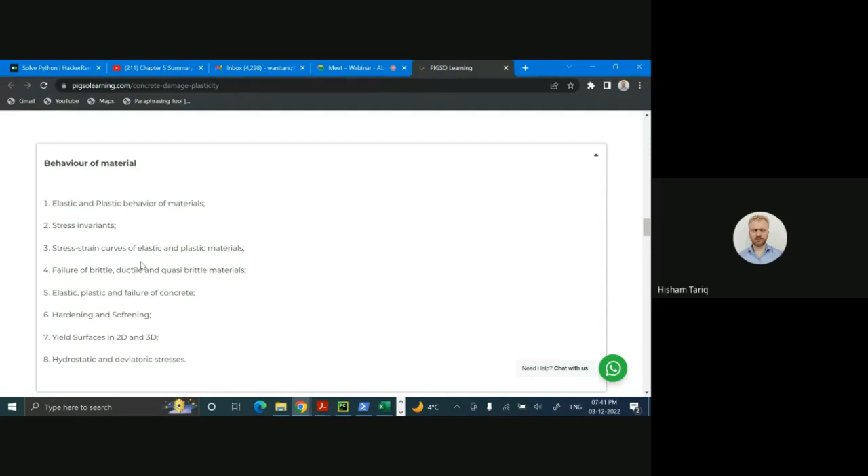I'll quickly discuss the syllabus. Firstly, we'll start with the behavior of materials, mostly elastic and plastic materials, where our focus will initially be on concrete. We'll discuss how brittle, quasi-brittle, and ductile materials fail, then stress-strain curves of elastic and plastic materials, then move towards elasticity and plasticity of concrete, hardening, yield surfaces, etc. These will be the basics of material behavior that will help you understand how we define the concrete damage plasticity model.

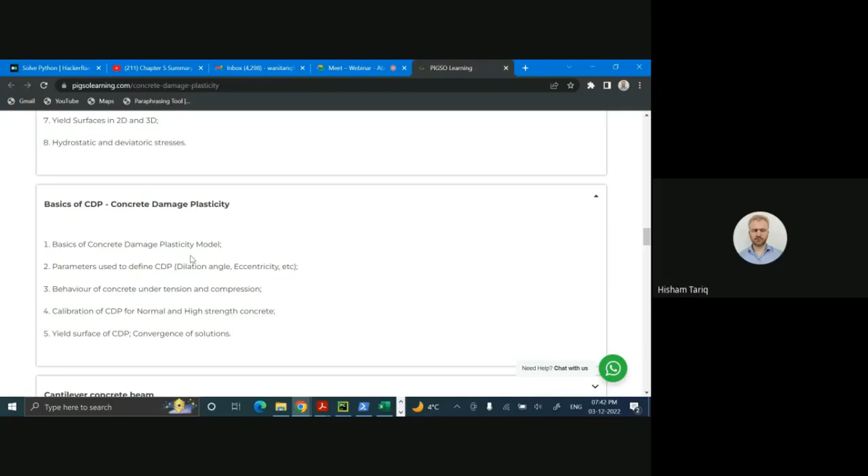This model is in Abaqus and helps you simulate the behavior of concrete. This constitutive model is very famous and widely used throughout the research community of structural engineering. We'll study the basics of the CDP model, the parameters used to define it, and the yield surface of the concrete damage plasticity model. Then we'll study the behavior of concrete in tension and compression, discussing equations and how to plot or obtain the stress-strain curve of concrete if you know its strength. There is a slight difference for normal strength concrete and high strength concrete. We'll discuss all these things, and then, if you use the CDP model, you may have convergence issues if you use Abaqus Standard.

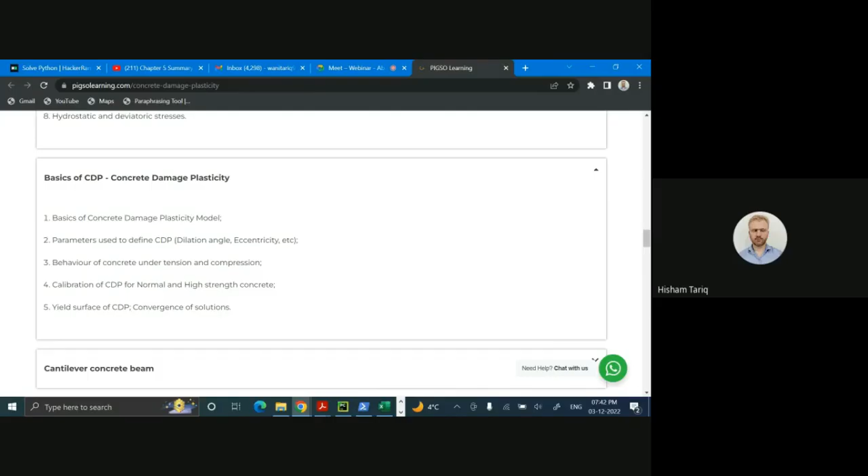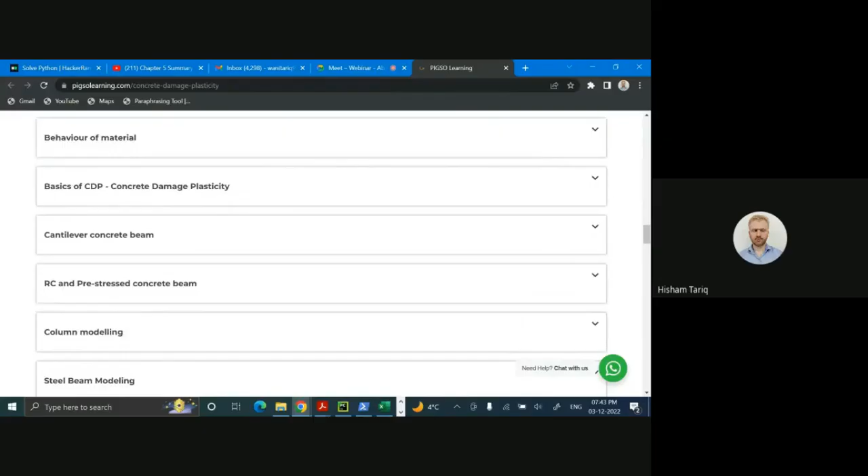That will also be demonstrated, how to take care of that. Further, we'll apply the concepts learned here and in material behavior and CDP in a cantilever beam. So we'll model a cantilever beam, a plain concrete cantilever beam.

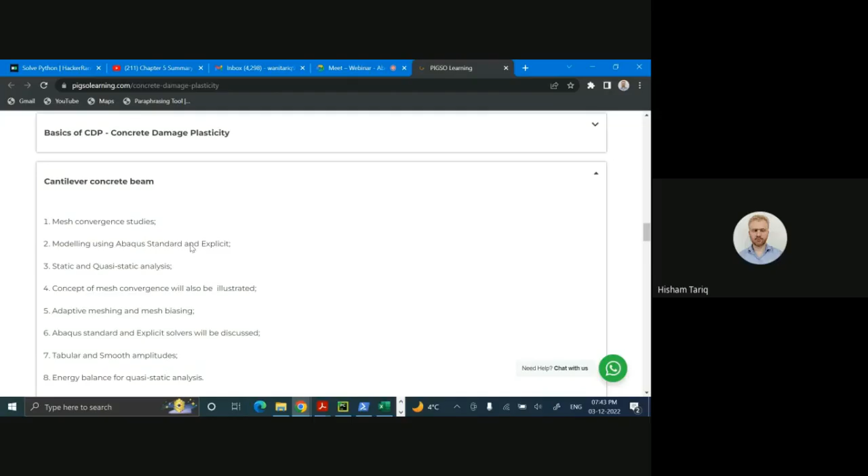Then I'll discuss mesh convergence study. There are two main solvers in Abaqus: implicit, that is Abaqus Standard, and explicit. I'll discuss the difference between them, how each solver solves the problem. Static analysis is done in Standard, and quasi-static in explicit. I'll discuss those things, and mesh convergence will also be illustrated.

Then I'll teach about mesh biasing, how in some areas you need fine mesh and you can keep the coarser mesh near the areas which are not of interest to you in the beam. Similarly, the difference between the results in Standard and explicit will be discussed, following how you have to define the load. You can define it instantaneously using a tabular amplitude or smooth step. Those things will be discussed in this module.

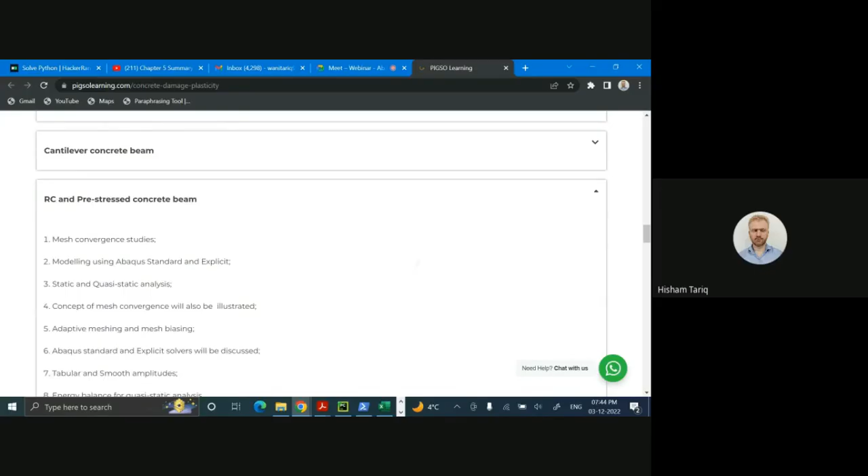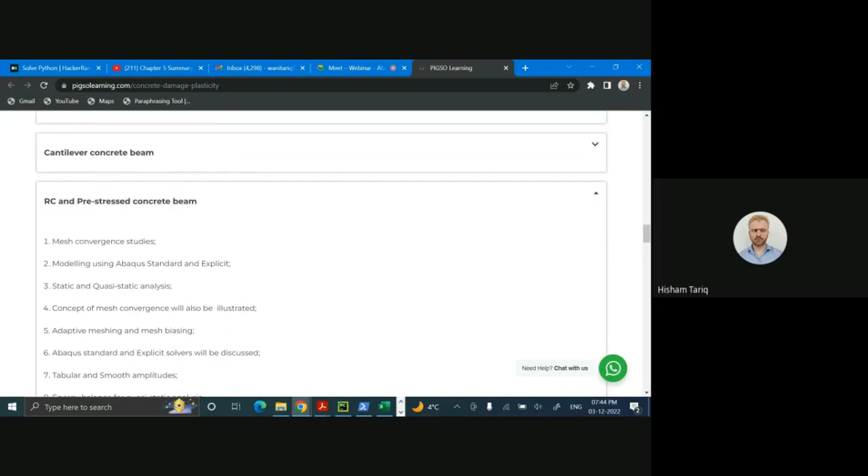Following that, we'll go a little bit advanced where we'll reinforce our concrete beam. So after reinforcing our concrete beam, we'll... okay, there is some, I don't know, this has been copied twice. Anyway, Mayank, you should correct it.

You should put the contents of RC and pre-stressed concrete beam here. Anyway, here we'll discuss how to give reinforcement to the concrete, embedded constraint, basics of steel as reinforcement. Then we'll go over how to give pre-stress, because in pre-stressed concrete you have to give pre-stress to your bars. We'll also discuss that.

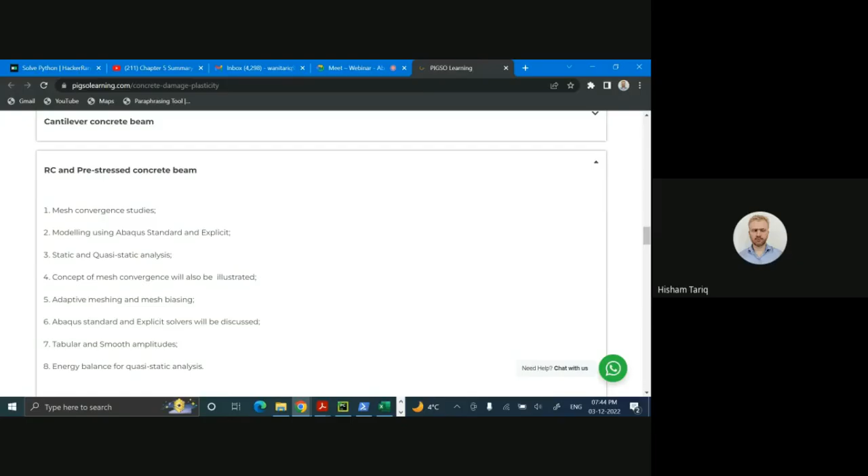And that is, the most common method, a cooling method where you use thermal stress analysis. That's how pre-stress is given, so I'll discuss that in this module.

Following that, we'll model a concrete column under compression using a solid element, or if you have a circular column, to improve the computational efficiency we can also model using axisymmetric elements. That will be demonstrated. Obviously for axisymmetric elements, the load should be axisymmetric, boundary conditions should be axisymmetric, and the geometry should be axisymmetric.

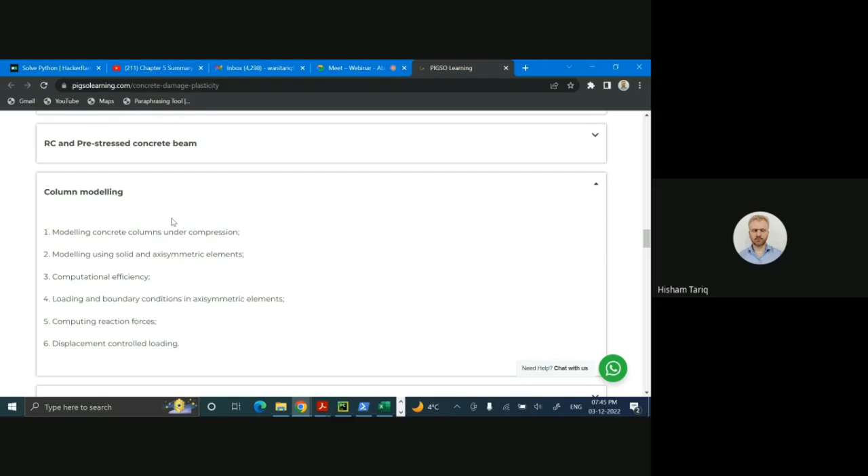That will be demonstrated. Following that, I'll discuss how, if you are modeling a column and you want to compute the reaction forces, we have to use rigid body constraint for that. That will be discussed further.

Displacement control loading will also be shown, because there are two types of loading: either you apply a force somewhere, or displacement control. If force is applied, then say force is constant, acceleration is constant, velocity varies linearly with time, and displacement varies as a function of time quadratically. But if you apply displacement control loading, then you are just varying displacement with respect to time. So there is a fundamental difference between the two types of loading that will also be discussed.

Furthermore, we'll go with steel beam, and I'll also demonstrate some of this today. We'll model steel as elastic and then as plastic material, because it's a ductile material. Then what constitutive modeling models are used for steel will also be discussed. In that, probably we'll discuss today also engineering and true stress-strain, plastic strain, these things.

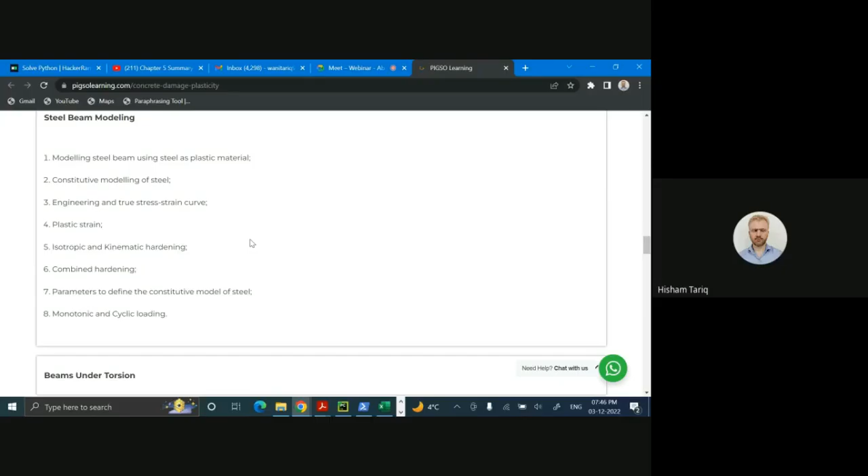And then isotropic and kinematic hardening, these things are for cyclic loading, because if you are modeling steel under monotonic loading or cyclic loading, you have to define parameters differently. So that will also be discussed. We will, after this introduction, discuss today just steel beam under monotonic loading.

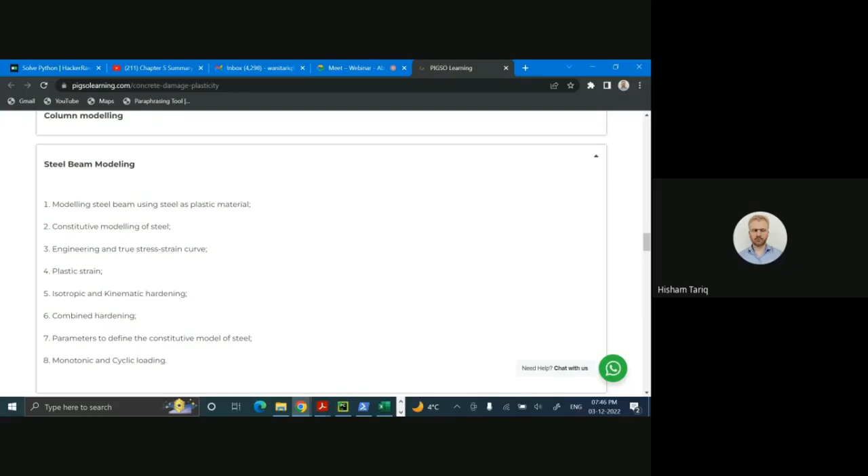Further, I'll show you how to apply torsion on a beam and do torsional analysis. We'll see the variation of shear stresses in different beams, maybe circular, square, rectangular, and for that we'll use coupling constraint. We will couple the reference point to the surface and apply torque on that.

Rigid body constraint for computing reaction forces, and these meshing techniques and path plotting, they'll be like there are hex dominated, wedge techniques. These meshing techniques will be used for modeling circular beam, and path plotting will show you the variation of shear stresses along a path.

So then we'll go to heat transfer analysis and thermal stress analysis. This is important because it has application in, maybe, concrete under fire, or simulating thermal behavior of viscoelastic materials. We'll start with how heat transfer analysis is performed in Abaqus. We simulate conduction, convection, and radiation, and also temperature boundary conditions are given here. We don't have to use the geometric boundary conditions for heat transfer analysis.

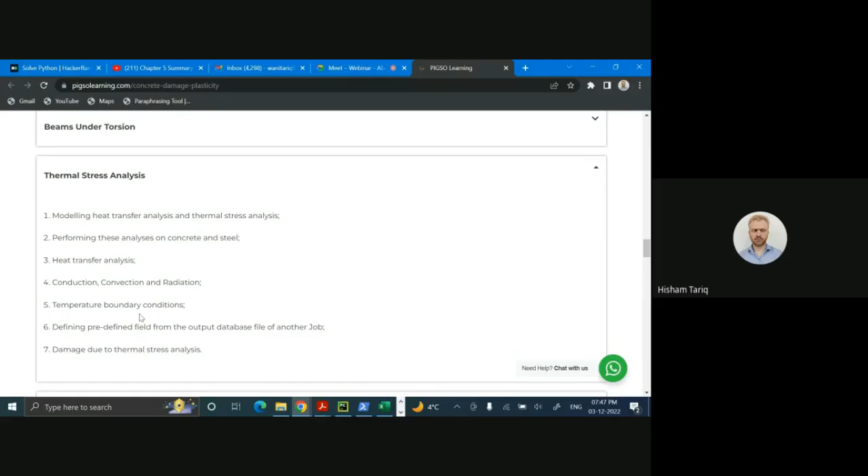Then I'll move to thermal stress analysis, for which we define this temperature field using another job file; that will be demonstrated. Then we'll apply it to concrete and steel, and I'll show you how it causes damage to concrete.

Then we go to damage analysis, where we have a concrete sheet and an object falls on it. We'll use the dynamic explicit solver for this. Obviously, when you're in dynamic explicit studying impact problems, you have to define inertia and give mass to your falling object, or maybe to the whole system.

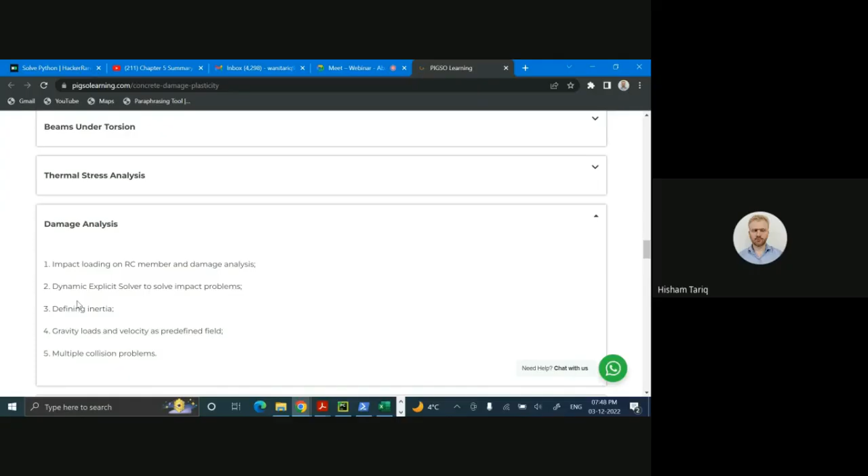Then I'll show you multiple collision problems. Suppose a ball or object falls on the sheet, then goes up, goes down, goes up, goes down, like that, in the presence of gravity. That will also be demonstrated in this module.

So this will probably be it about the modeling part, the modules, and we'll go for projects. Firstly, we'll model a cantilever beam, maybe an elastic cantilever beam.

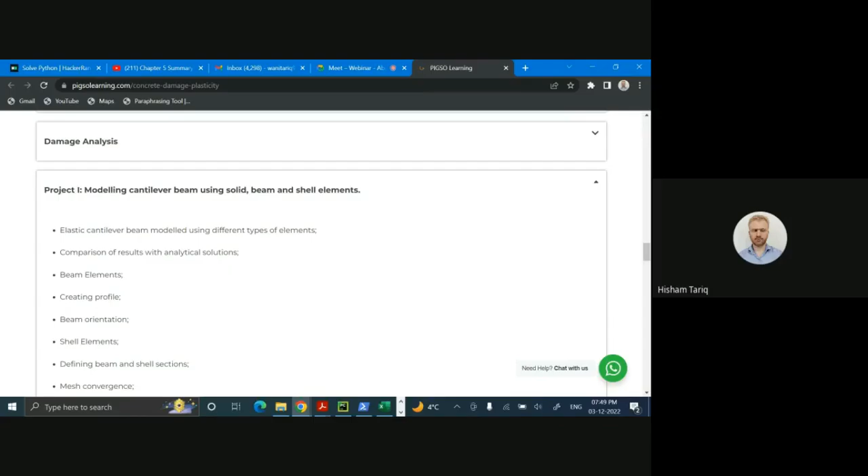What we'll do is take a similar problem, a cantilever beam with a displacement applied at the tip, and solve it with solid elements, shell elements, beam elements, and plane stress elements. In each of these, we'll go into detail and compare the results and the computational efficiency in each case. This will be the first small project.

Then we'll study the size effect of concrete. I'll use plane stress elements and concrete damage plasticity. What we'll do is change the size of the element self-similarly, and see how it affects the tensile shear stress-strain curve of concrete.

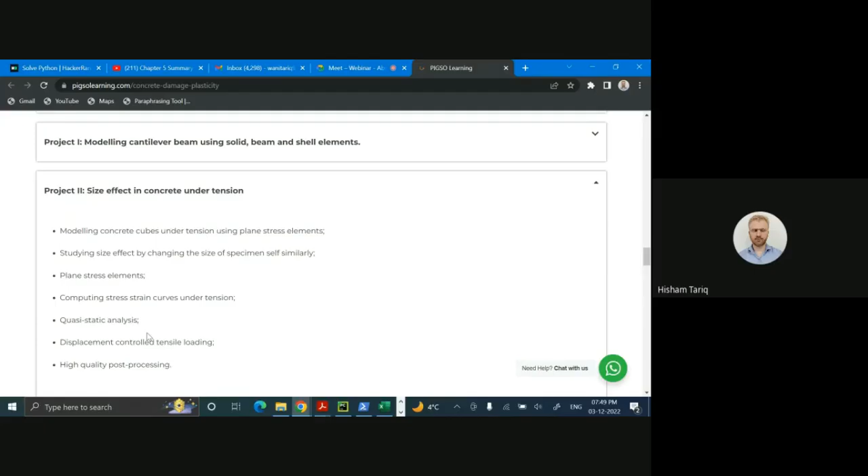I'll show you very good post-processing, how you remove the edges or whatever, and how to extract data from a bucket. Those things will be demonstrated, and obviously quasi-static analysis will be used. This will be discussed before that also.

Third project, we will model plain walls. In the previous course I modeled plain concrete walls, but now I'm thinking we can go with reinforced concrete walls also, and subject them to pre-compression followed by in-plane loading, then study drift capacity, stiffness, and in-plane strength for different levels of pre-compression. Different levels of pre-compression will affect these three variables.

Then we have the aspect ratio. Suppose we have a square wall with h by l, height to length ratio of 1. Then you have something like a slender wall, where height is greater and length is smaller, so h by l ratio is greater than 1. And then you have a squat wall, where length is greater than height. We'll study these three walls, and these parametric investigations can be carried out. I'll show for something, and the rest is your assignment, and you have to make a report out of it.

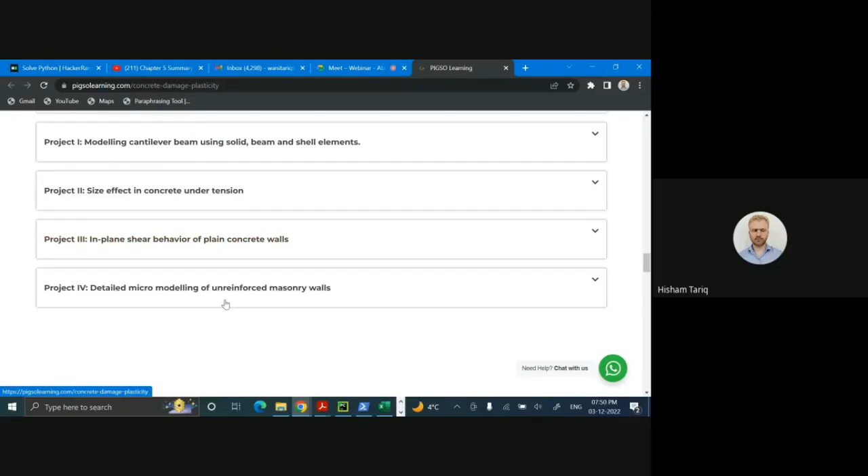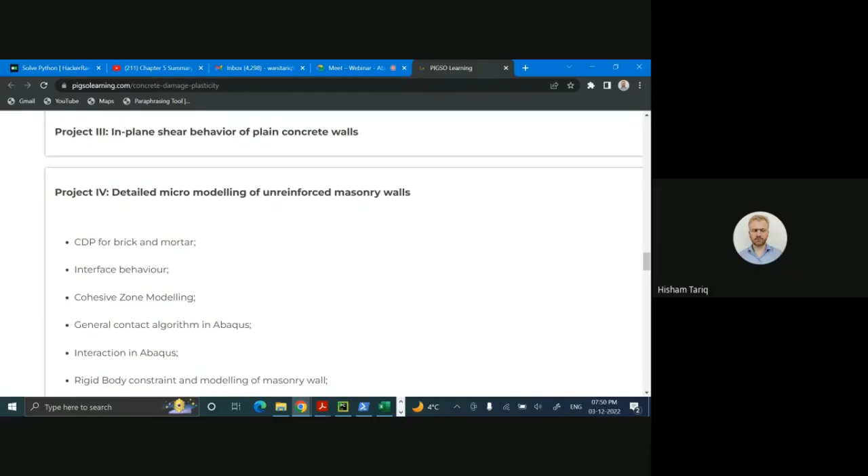Finally, if we get time, we'll go for unreinforced masonry. I have done this in a previous batch. Hopefully we'll be able to do it, but it's an optional project. If we get time, we'll study bricks and mortar, define them, and simulate them as plastic damage material using the concrete damage plasticity model.

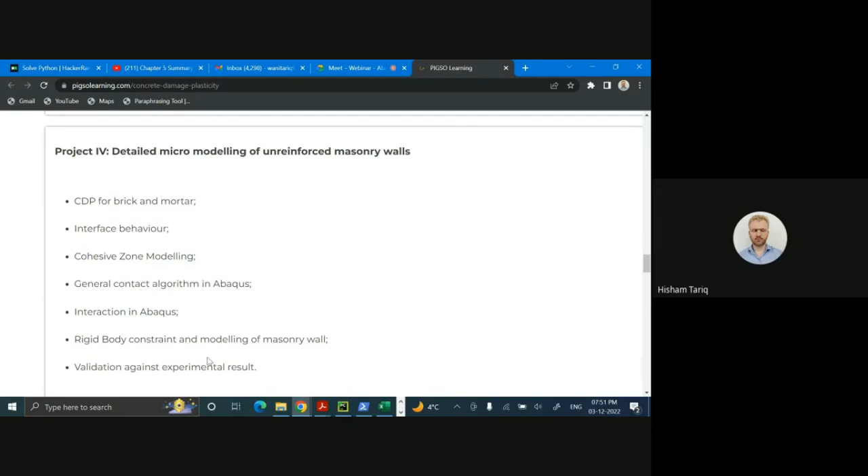I'll also discuss cohesive zone modeling and the interface between brick and mortar. Following that, we'll go into detail and validate our model against an experimental result. There is an experimental wall that was tested, maybe in 1994 or so, in the Netherlands. We'll model that wall in Abaqus, and I'll show you how our results agree well with the experimental result. So this is probably it about the syllabus.

Okay, so this will be just about monotonic loading.

So at lower levels of stress, the stress strain response is linear. Everyone knows that, right? But when the stress exceeds the yield limit, I'll show you what happens.

So what happens? Unloading will start, and it will come back to its own position. Suppose you have a specimen and you are pulling it. If the stress strain response is in this region, the moment you release your load, the specimen will come back to its original position. At this point you release your load, the unloading will start, and the stress strain curve will be like this. It will not come back to its original position.

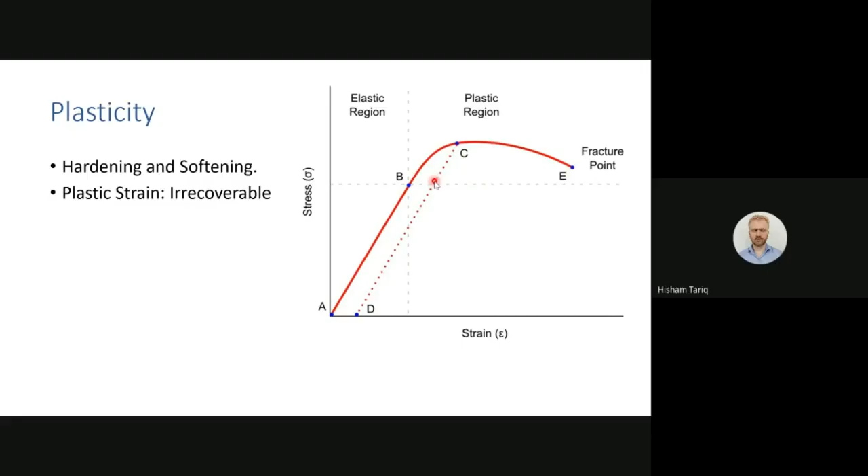I'll illustrate this in more detail. So firstly, let's talk about engineering and true stress strain.

But when you elongate, say, your steel bar, what happens? The longitudinal dimension L naught will increase by U, and A naught will decrease because the volume has to be constant. So A naught will decrease to A, and L naught will increase to L. So you can't use these engineering relations — they give you stress and strain, but not in the actual sense.

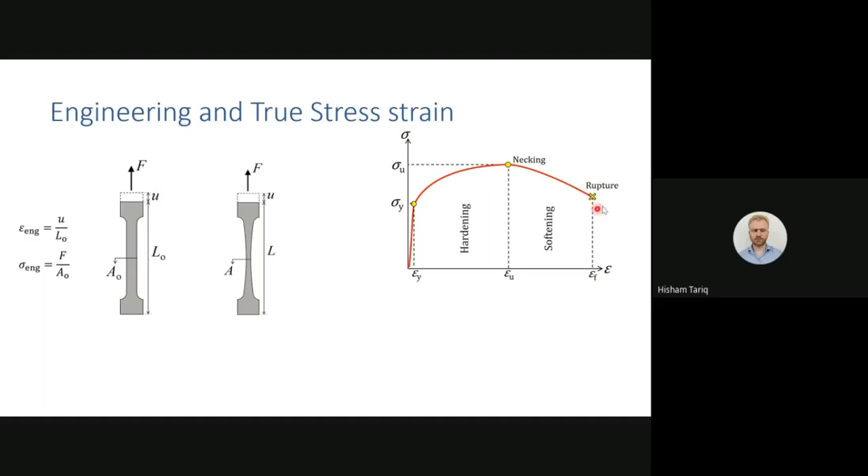So this is how the stress strain curves look like. Initially this is the yield point, yield limit. Then there is hardening, and at this point it's called necking. Necking means at this point the strain gets localized, and then it softens, and it's called rupture. So this is the engineering stress strain curve.

This red curve was engineering, but for the true stress strain curve, true stress is less than... sorry, true strain is less than engineering strain, because when you use ln, it decreases. But true stress is greater than engineering stress, because 1 plus engineering strain is slightly higher than 1, maybe 1.0001. So you can see the true stress strain response is slightly higher here.

But this relation is followed only up to necking — these two equations apply before necking, which is the localization of strain, only in the hardening region. After necking, till rupture, how do you calculate the true stress strain curve?

Either you use a simple linear variation. At rupture, you have the load applied in the experiment and the area of cross section you measure. You divide the force by that area to get the true stress at rupture. And the true strain is given by the same equation, ln of 1 plus engineering strain.

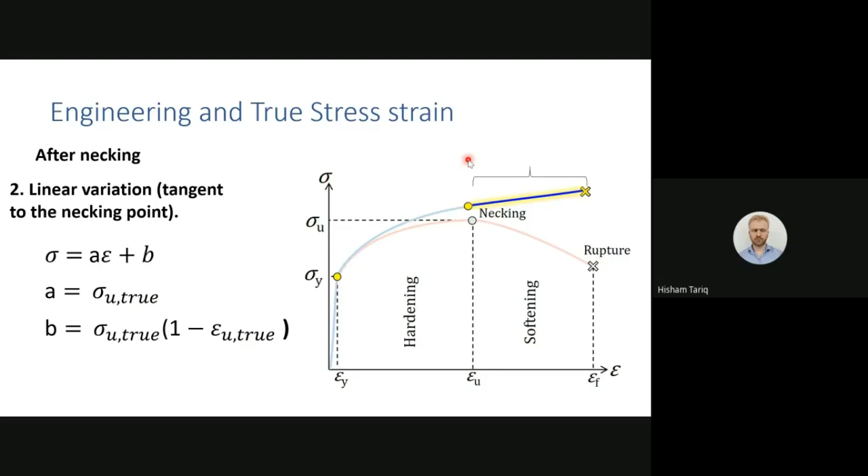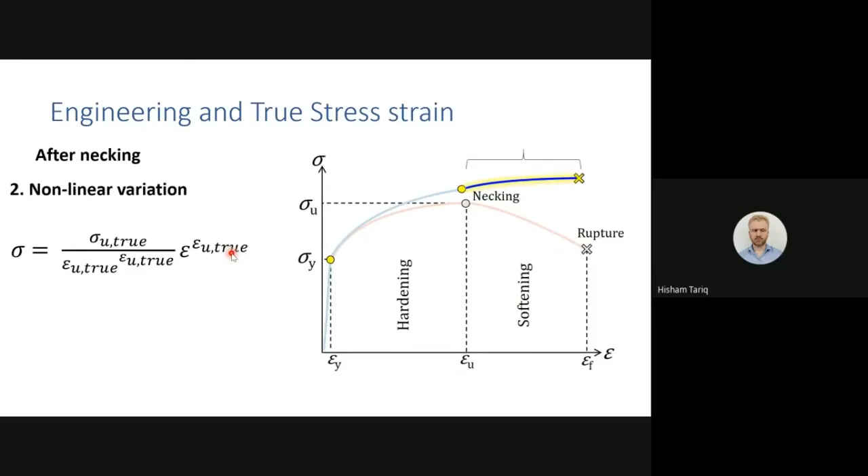This is a non-linear relation. When you enroll for the course, I'll share the research paper, by Ling in 1996. The paper's name is, I think, 'Stress strain curve of steel after necking' or something like this. So this is taken from that. These three methods were discussed: how to compute true stress strain curve after necking.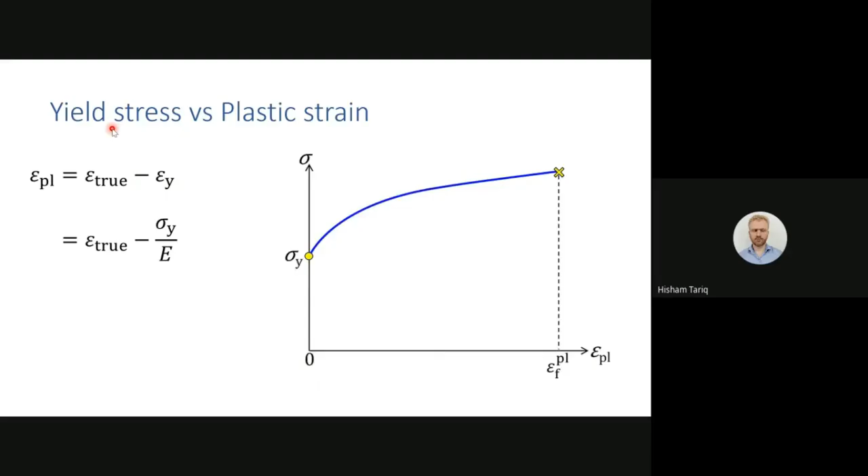Then in Abaqus, you have to input yield stress versus plastic strain. You already have the stress values, but how will you calculate plastic strain? True strain minus elastic strain. Elastic strain is epsilon y. So at this point, plastic strain equals true strain minus epsilon y. Epsilon y is given by sigma y by E. So you put this data in Abaqus, and this is how it looks: steel stress versus plastic strain, and you model the steel material.

Okay, so now I'll quickly go to Abaqus, and you can maybe get started.

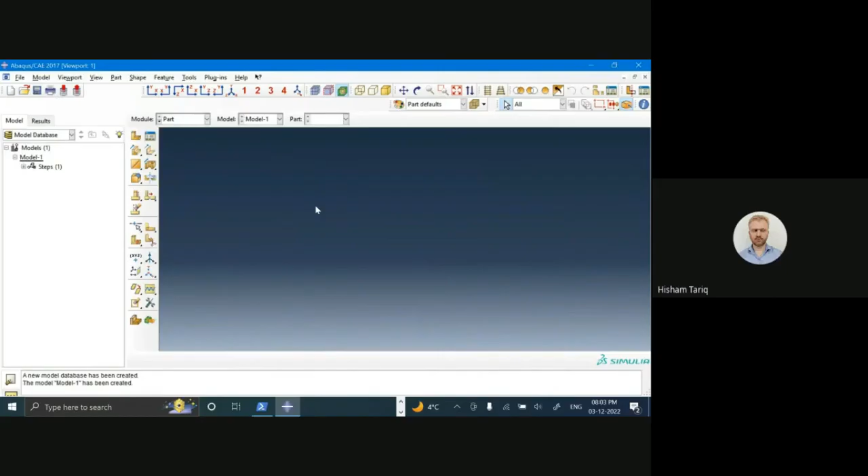So we'll do an elongation test of a rod, a steel rod. I can name it as rod. We'll model it in 3D, and it is deformable, using solid element, obviously, and I'll use extrusion to construct the rod.

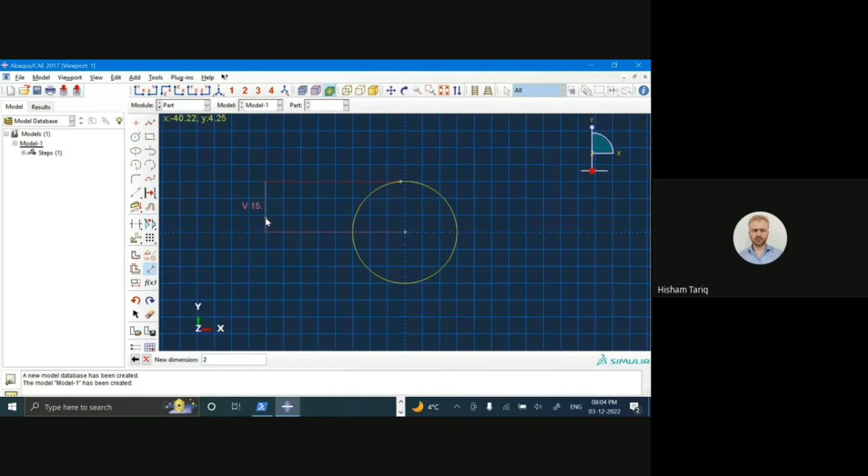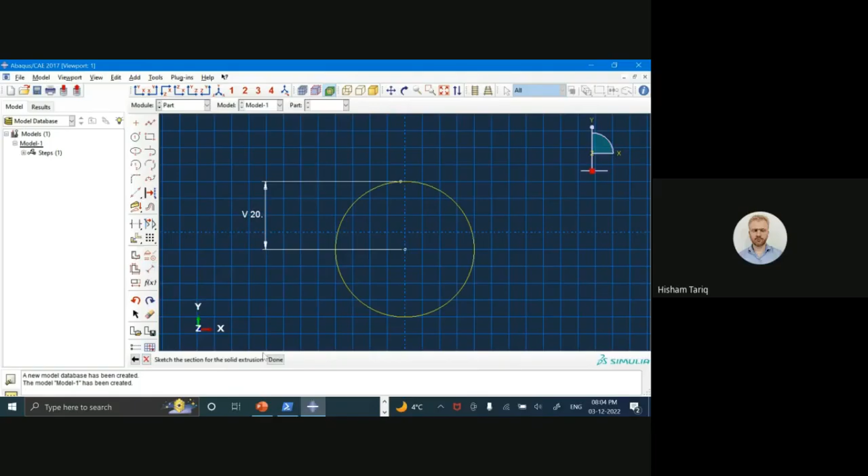I'll draw a circle here. This is how you click on this and draw a circle. I'll use some dimensions, the radius. How much should be the radius? Maybe 20 millimeter. Please note that Abaqus does not have any system of units, so if you are using a specific system, be consistent with it. Here I'm using millimeter for distance, Newton for force, and seconds for time. Then I'll click this; it will ask how much depth should I extrude, so maybe I'll go for 2000. So this is your steel rod.

Okay, go to property. Now we have to create steel. You go like this. Firstly, you define, keep it as just I'll show you, density, that is 7800 kilogram per meter cube, right?

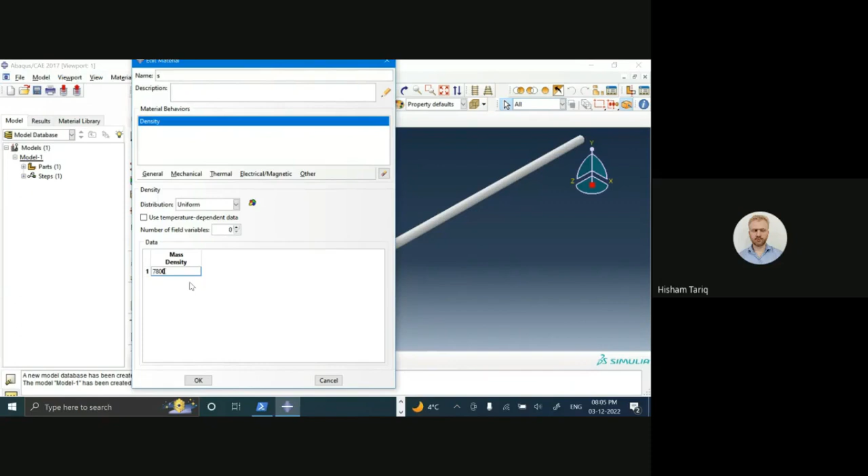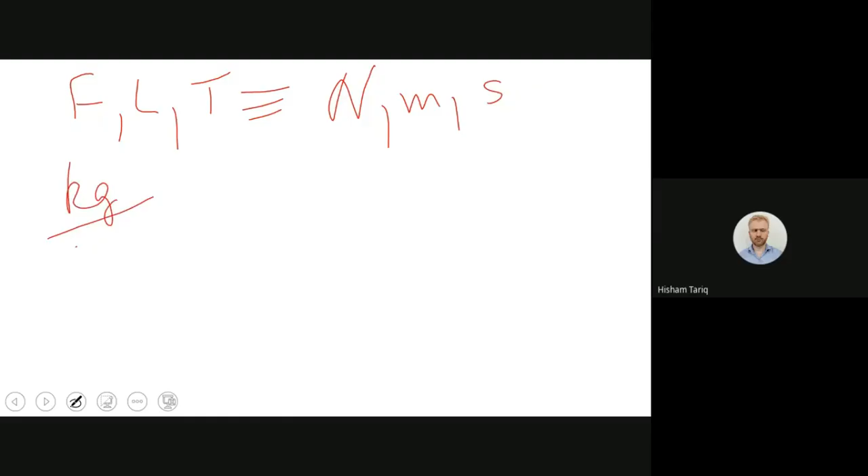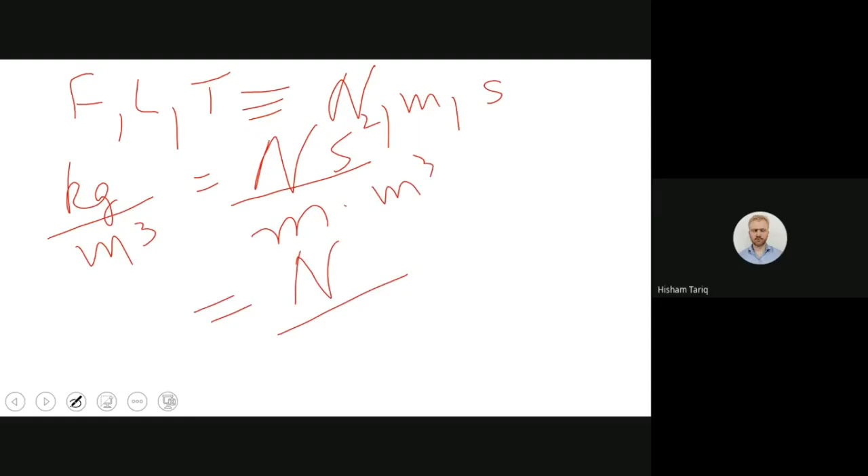But here instead of meter, I'm using millimeter, and kg is not my standard here, because my unit system is not MLT here, it is FLT. So kg per meter cube can be written like this: N equals to, like, F equals ma, right? Then I can write kg as Newton second square per meter. This is kg, and your meter cube, obviously second is same so just leave second. So you have Newton. If I convert these meters into millimeters, I'll get 10 raised to 12 millimeter cube. So I'll divide this value by, this is basic dimensions, 10 raised to 12. So it will be like 7.8 times 10 raised to minus 9. This is your density, right?

Then you go with elasticity. So Young's modulus of steel is, how much is it? Can anyone tell me? 2E11 Pascal, right? But here my units are not Newton per meter square, it is Newton per millimeter square, that is megapascal. So I'll divide this by 10 raised to 6. So it'll be 2E5. Poisson ratio is 0.3. So this is steel as elastic.

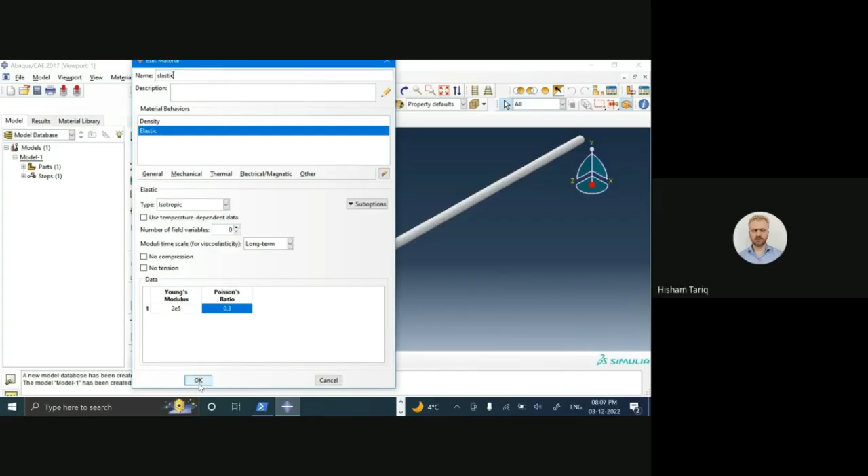Steel as elastic. Okay, then I'll first demonstrate elastic, then plastic.

I'll create a section, name it solid homogeneous. I'll just name it section 1, but you can name it steel. This material is used. This is now a section. To assign this section to the bar, you need to know which bar it is. Is it concrete? Is it steel? Is it aluminum? What is it?

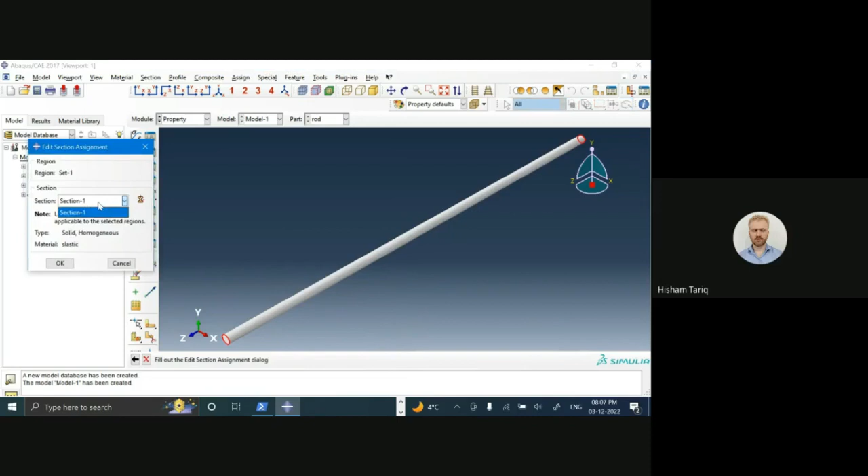So I have now assigned it. This is the only section we have created, and now this is a steel bar. Then bring it to assembly. When you create an instance, this means you had a part, and now you are doing an experiment on it. So you have transferred your part to the modeling space.

Now I'll apply some loads, boundary conditions, and stuff. Going to step here, I'll use Abaqus Standard, static general as of now. Obviously, later in the course, I'll discuss the difference between the two.

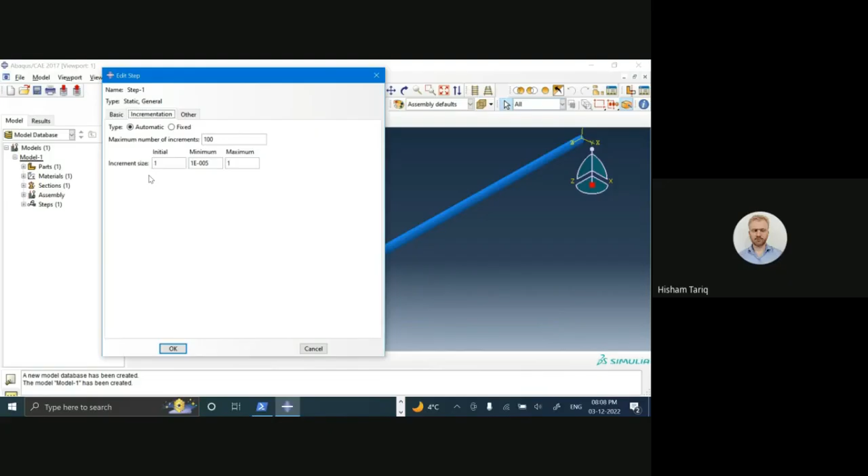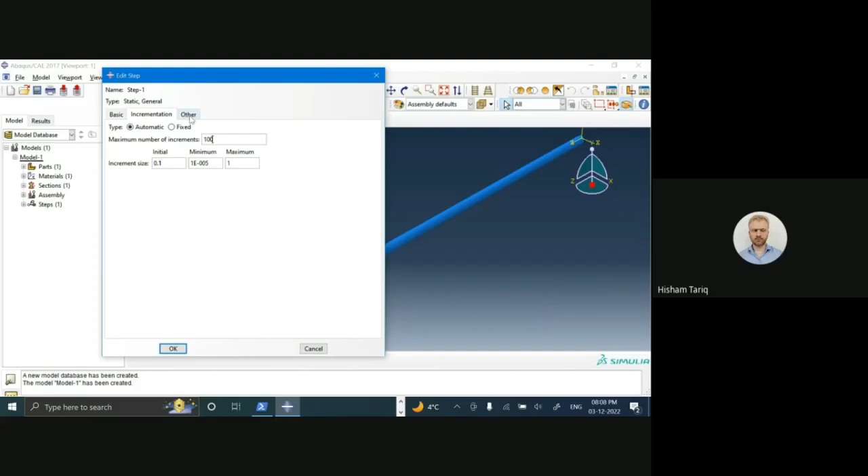So I'll use this 1 second time period. Abaqus Standard can sometimes directly solve in one go, but sometimes it cannot, so it's better to start with point one. It will first start applying load, say linearly varying, so first point one, then point one again, then again point one, like that. You'll see, I'll show you. Just keep it as it is, fine as of now, no need to change it. Okay, so this is step.

Then there is field output request. What do you want Abaqus to calculate for you? It has mentioned a lot of things: stress, displacement, strain, everything. Obviously, you cannot have plastic equivalent strain or plastic strain or LE for elastic material, so it's okay, it'll show warnings, but you can also remove them. Anyway, let's keep them as is because it's just a demonstration.

So we'll go for load. I'll fix this end and apply a displacement here, some displacement. Let's fix this end first.

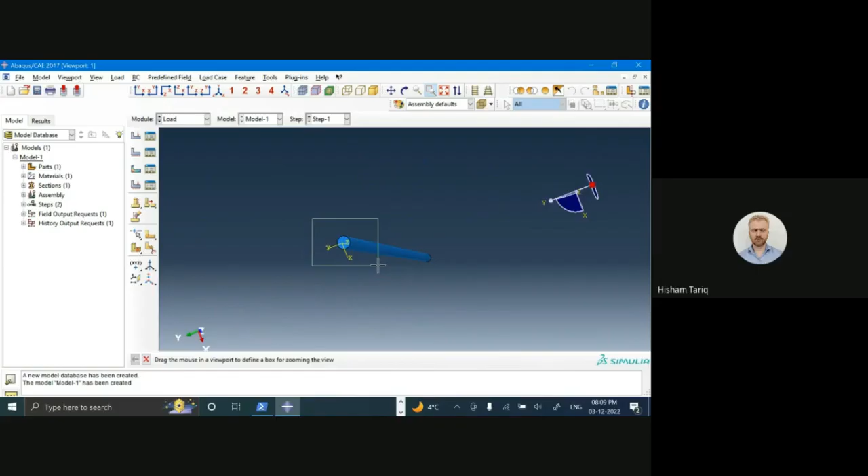If you go like this, this is box zoom view. Then you draw like this, it will zoom. Go for boundary condition, I'll fix it in the initial step. Select this one or this one, this one, then select the surface and fix everything. Now everything is fixed here.

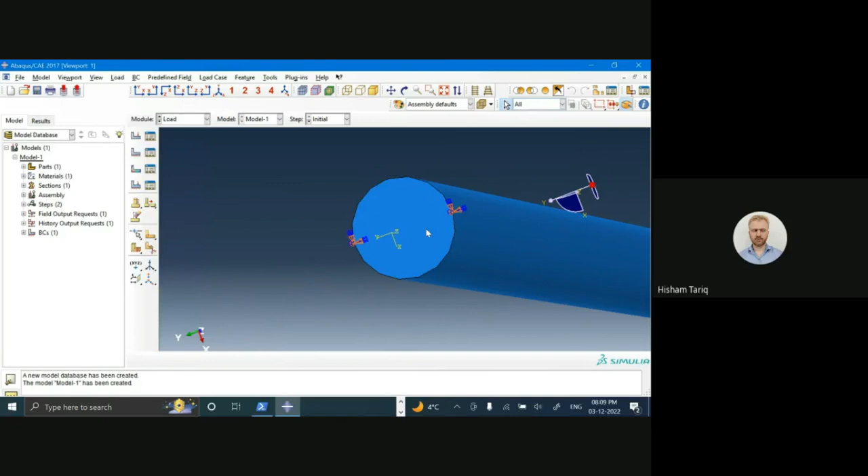I want to apply a displacement here, and also I want to get the force displacement response. I want Abaqus to calculate the force displacement response for me. So how do I do that?

I'll go to interaction and first create a reference point here. Now I'll use a constraint called rigid body constraint. So what it does, I'll show you. I'll select this reference point and I'll maybe pin or tie, you can use both of them, to these nodes.

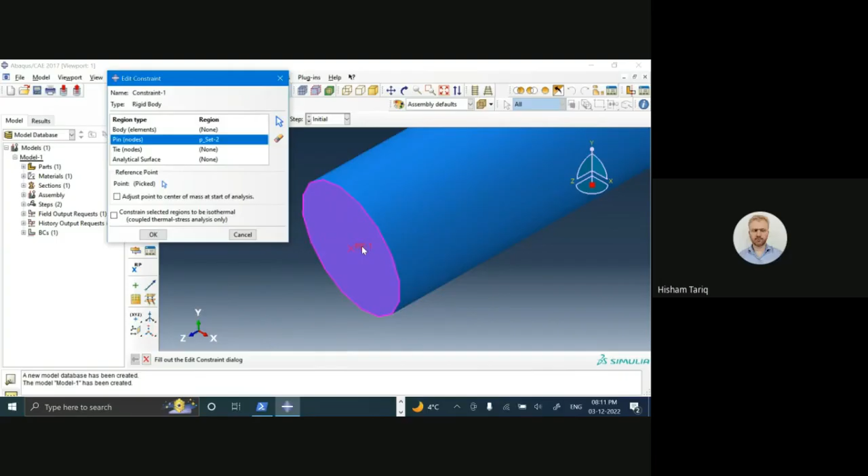What happens is, now all these nodes will behave as a rigid body, and if I give, say, 1 millimeter displacement or 1 millimeter per second velocity to this RP, that will be transferred to all of these. First thing. Second, then I have to calculate force displacement response at each node, because FE analysis discretizes the system. At each element or node, there will be a small reaction. This constraint sums up all the reactions and stores them here, so I can get the force displacement response for this bar.

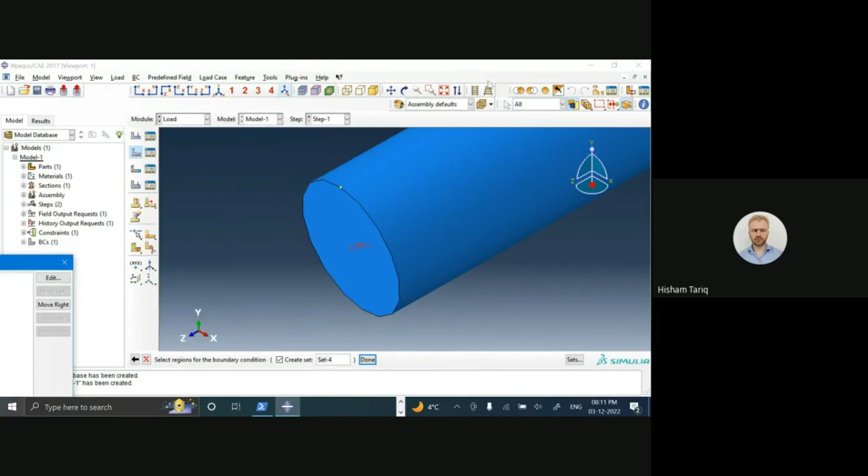Now this RP is here. Again, I'll define a displacement at this reference point. I want to maybe subject it to tensile loading. Click done. Just tensile loading, so all other degrees of freedom or constraints are 0.

But U3, I need to give some displacement, so I'll start with 3 millimeters. Give a displacement of 3 millimeters.

First thing. Another thing is I'll create a set. I'll name it RP and continue, then select this RP1. So a set is created corresponding to this RP1. Why? Because I need field output, I want Abaqus to calculate the force displacement response at this RP.

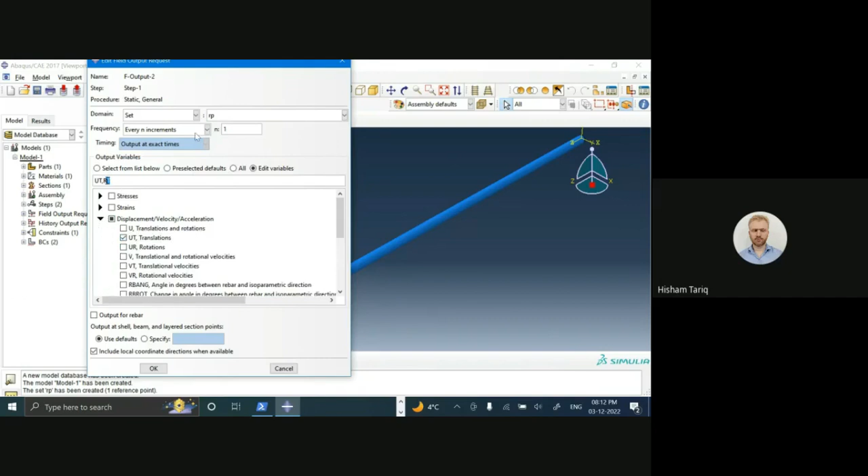So I'll go to step again, in this field output, create a field output here in step 1. What do I want, and for what? For set, which set? RP. And what do I want? Forces and displacements. Okay, so rest just keep it as is. Every n increment means how many increments Abaqus used, so at every n increments it will write the output. You can also use every x units of time.

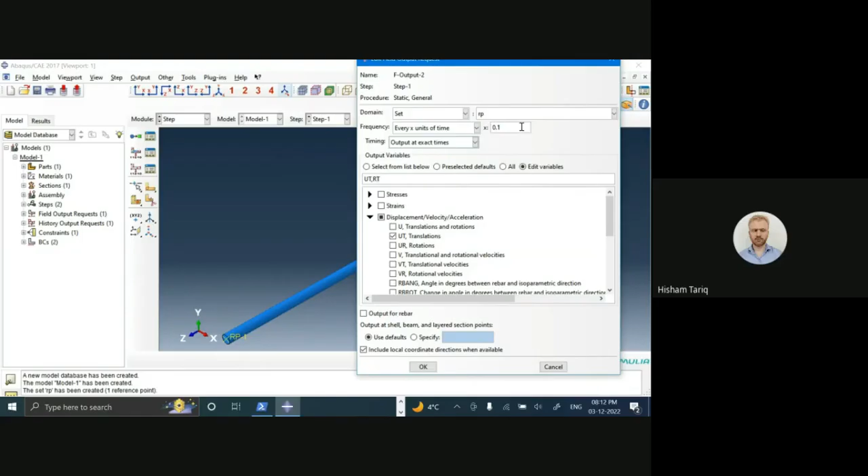Total time is maybe 1 second. I can here write 0.1, so it will now write output after every 0.1 seconds, then select OK. You can also use n increment, depends. So we have also applied the load maybe. Yes, now go to mesh. We had, see, if you go to, sorry, in assembly here, so this is dependent. This is dependent.

This is dependent because it's showing here 'make independent.' So when you go to mesh, you have to mesh the part. An assembly can be made of different parts, right? If you use independent, it will discretize the whole assembly together. If you mesh by part, you can discretize some parts finer and some coarser. I'll explain it later when we have multiple parts.

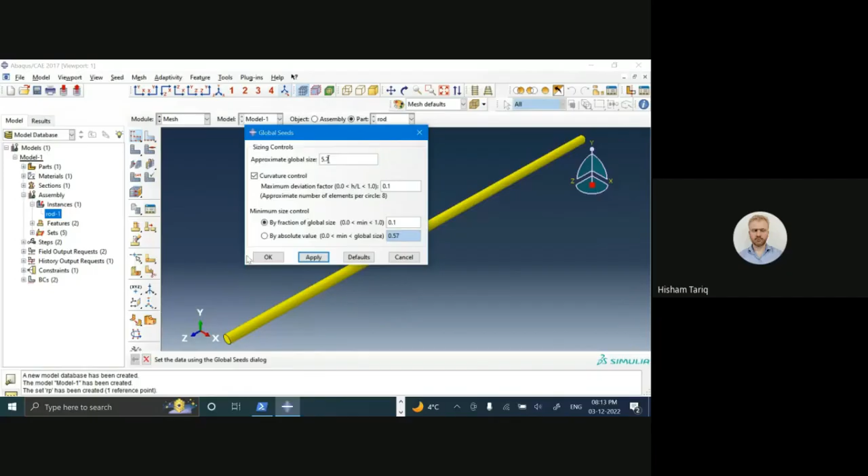That's not an issue. Anyway, just see, this part is 5.7 millimeter. Let's keep it as it is. And this is now discretized, so it is divided into small elements. This is FEA, right?

Following that, I'll go to job. I'll select elastic, with 3 millimeter displacement. Now I have to use parallelization because my PC is relatively good, so I'll use 6 processors to solve it quickly. I have 8, I'll use 6. Submit this.

So this will be completed very fast. This was elastic, right? I'll copy this model and name it steel. Everything is same. Now I want to simulate steel as a plastic material.

In the first model, I just defined 3 things: density, Young's modulus, Poisson's ratio. But they are not sufficient to define plasticity. So how do I define plasticity? I'll show you.

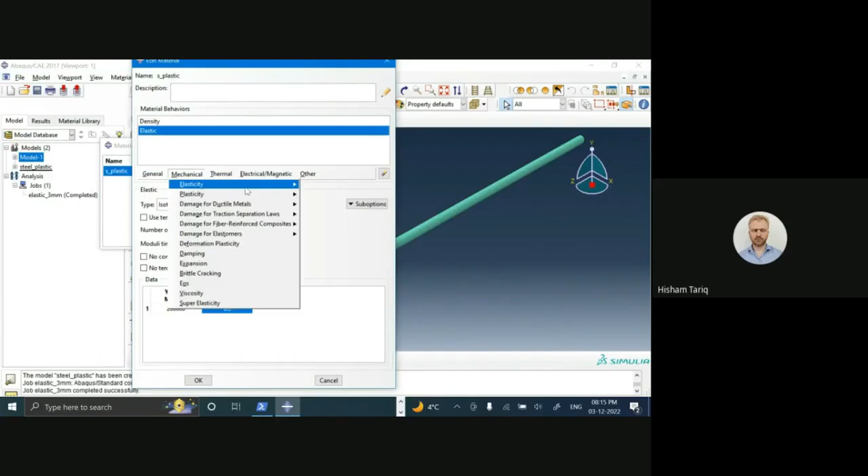Same material is there, maybe I rename it as plastic. Once I did it, these 2 things are as it is. You need to define plasticity and plastic here. As of now, keep it isotropic. When we go for cyclic loading, we have to use combined hardening and then use parameters. I'll discuss them when we reach there. So as of now, keep it isotropic.

As I said, you have to input yield stress versus plastic strain. This is where we stopped, right? Yield stress versus plastic strain. How do you calculate that?

I already have the data. Okay, so here is the data, this one. Okay, so here it is. See, this is the engineering stress-strain curve, right? This is from experiments. And this is the yield point, this value of stress.

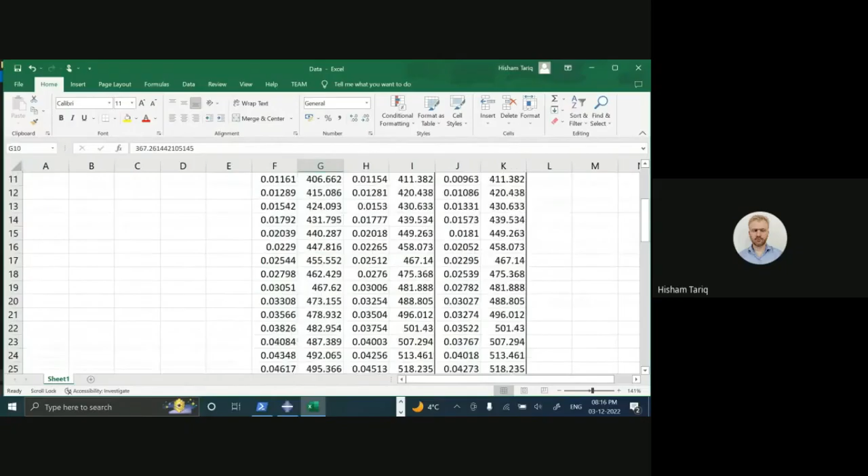After this, hardening will start, right? Hardening will start, then there is necking, right? I discussed necking, strain localization. So at this stress, engineering stress, necking starts. And then we have used a linear variation, these are from experiments, a linear variation from necking to rupture. So this is your engineering stress, engineering strain.

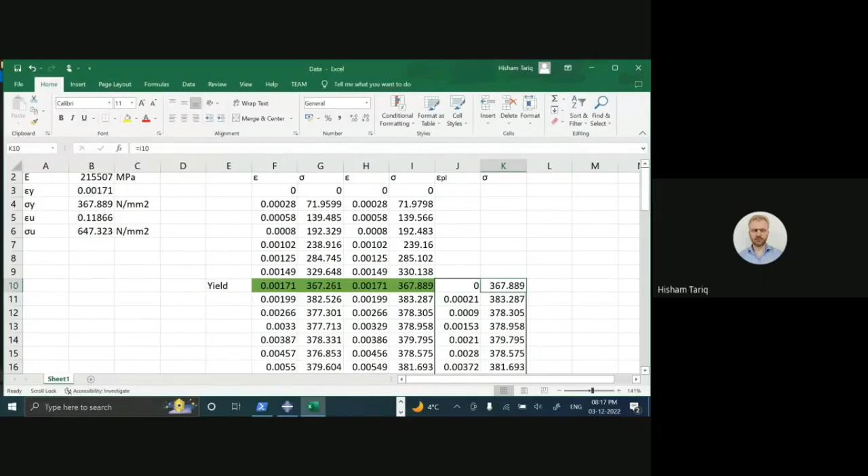You can convert it to true strain using this formula, already discussed. This is your engineering stress converted into true stress using this formula, already discussed. Now you have the true stress-strain curve. Up to yield, there will be no plastic strain, because if you unload, the specimen will come back to its own position. So at yielding, plastic strain will be zero, and this is your yield stress, that is true stress.

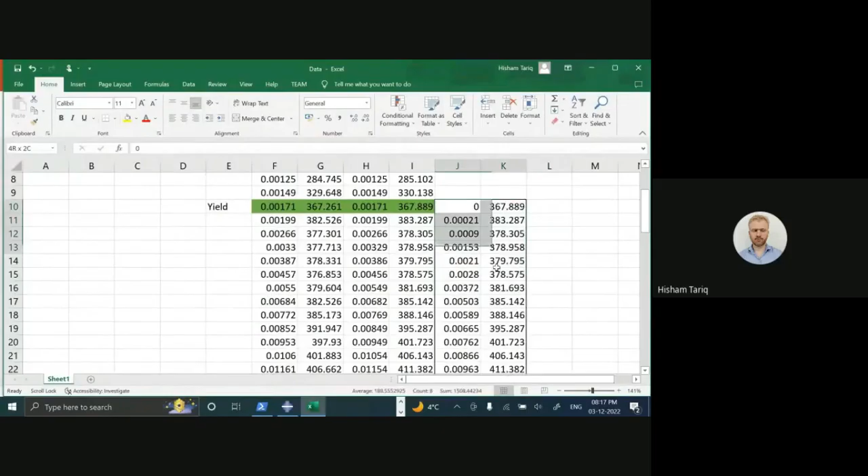Following that, you will calculate plastic strain using this equation. So the similar equation has been used here, and you will get the plastic strain and yield stress data. So this data has to be inserted in Abaqus, right?

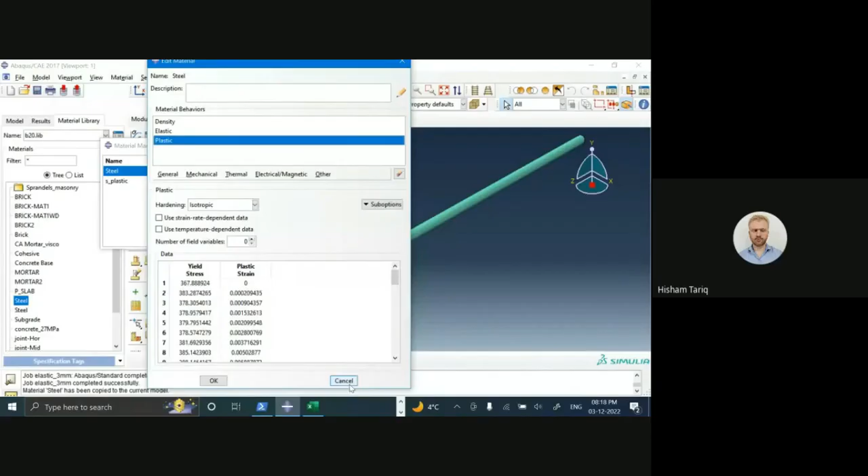So I have probably already defined this material in my material library. I click this, hopefully this will be... yes, see, I already copied this and defined it in my material library. Yield stress versus plastic strain. So all you have to do here is just change your section, change it to steel. Now it is defined as a plastic material. The rest, boundary condition, loads, everything is same. Only the change here was changing the material of steel from elastic to plastic.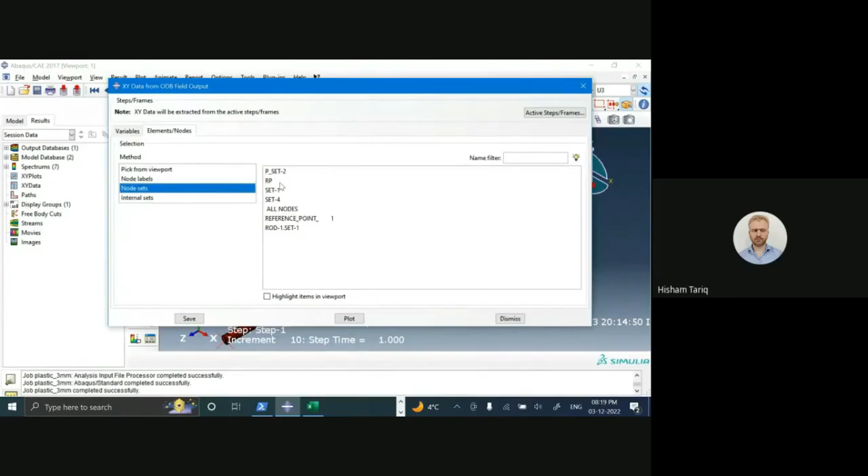But I'm more interested in the force-displacement response. So for that, I'll go to Tools, XY Data, Create. I'll use the field output because I had requested field output from Abaqus. I'll select at node, unique nodal, and go for RF3 and spatial displacement U3. You can also select this, both are same. Then I'll go, not pick from viewport, that's if you want to select any node here. What I want, I have already created a set RP. So go for that, plot.

So this is linear, right? And it is expected for an elastic material. Does anyone have any questions till now? No? Anything?

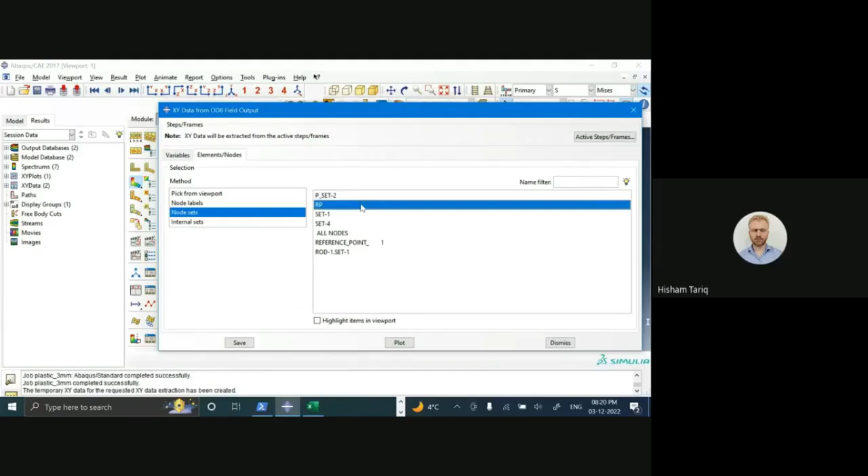Okay, let's analyze this one. This is the plastic material, right? Again, this is displacement control, but I am more interested in the force-displacement response. So this is already selected, I'll go here. So this is also linear.

Can anyone say why, what can be the reason that I model steel as elastic as well as plastic material, but the response is still linear? Anyone? It's a very simple answer for that.

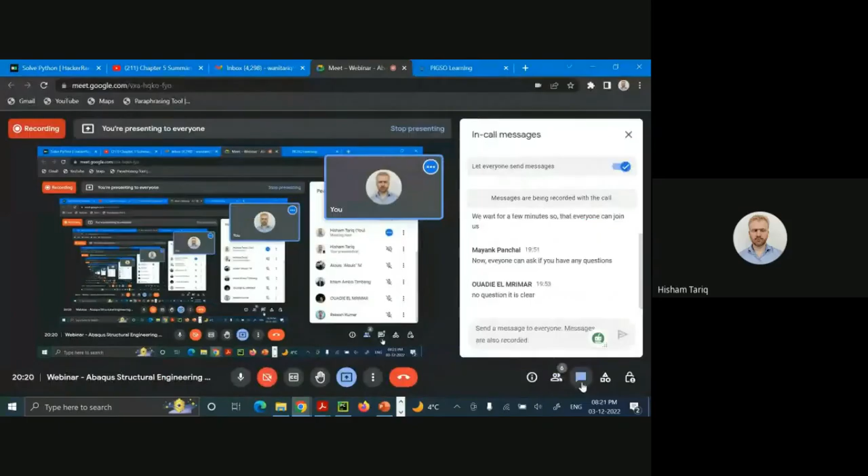No questions so far. Can anyone say why we got a linear response for modeling steel as both elastic and plastic? In both cases the response is linear. The reason is because the loading is small, and the stress-strain response is still in the elastic region.

How do we get a non-linear response, or how will we get hardening?

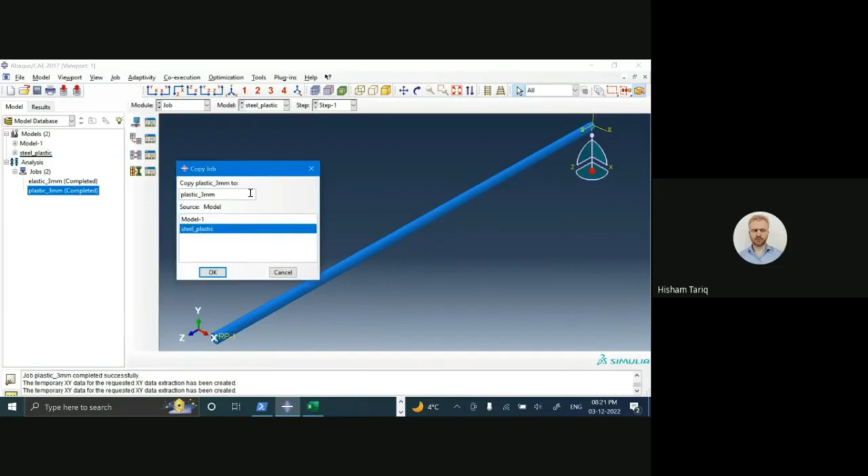We'll just change the displacement from 3 to maybe 10. Okay, 10, let's see what happens with 10 or maybe 15. You can already create this here, or just copy it. So my model is this, and I'll write 10 millimeters. Everything is the same, just the name is different.

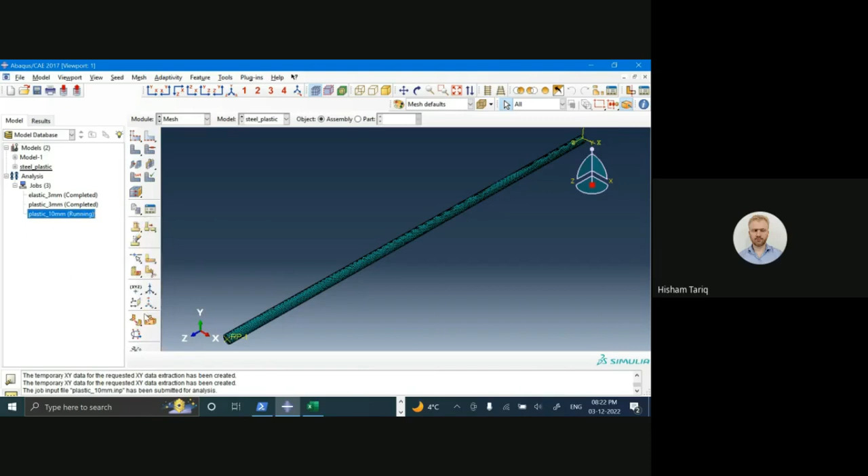Once you submit the job, whatever material and loads you have defined in your model, Abaqus will capture that and start working on it. So let's wait for it.

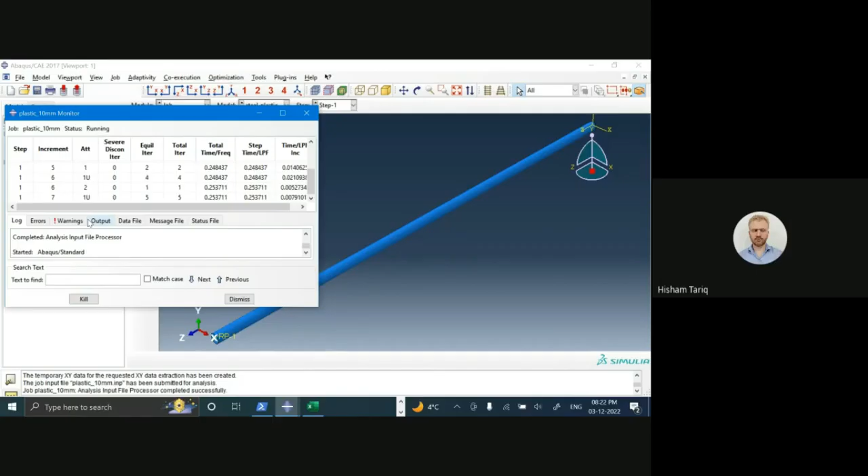Let me explain what is happening here. I told you we'll start with 0.1, right? Abaqus started with 0.1, then again used 0.1, then again 0.1. At the third row you can see there were convergence issues, so Abaqus could not continue with that time increment and had to decrease it. It decreased to 0.25, that was fine, then it tried to increase again, got convergence issues again, and decreased again. So this is how it works.

But when I gave a small displacement earlier, there was no issue at all. See, in plasticity with small displacement it started with 0.1, 0.1, 0.1, because I asked the output to write in 0.1 intervals. It ran smoothly because the displacement was small, there was no material non-linearity induced, and hence no convergence issues. Here too there are no convergence issues because it is elastic, so there's no point of convergence issues.

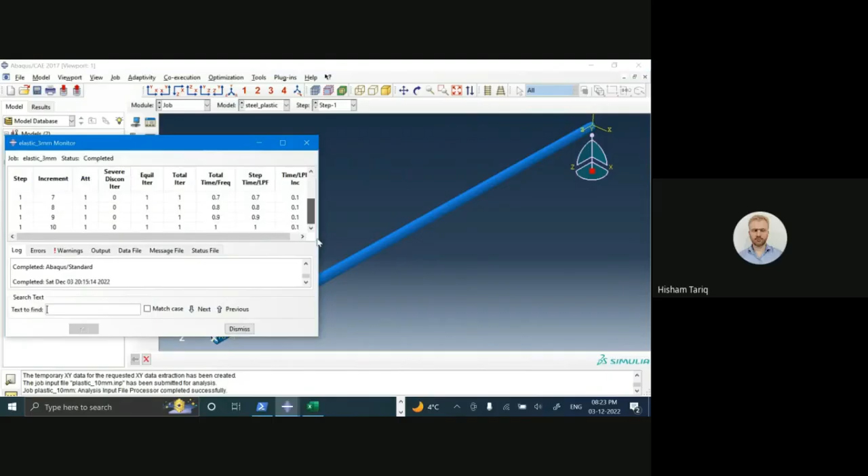But here it has some issues, it's going slowly and steadily. Probably if I ask it to show results up to time 0.29, we can see — just go to field output, this is already selected, go to element nodes, node sets, RP. See, it has bypassed the linear regime and is now in hardening.

Since it is in hardening, material non-linearity is there, so there are convergence issues. It will take some time to complete, but it will get completed.

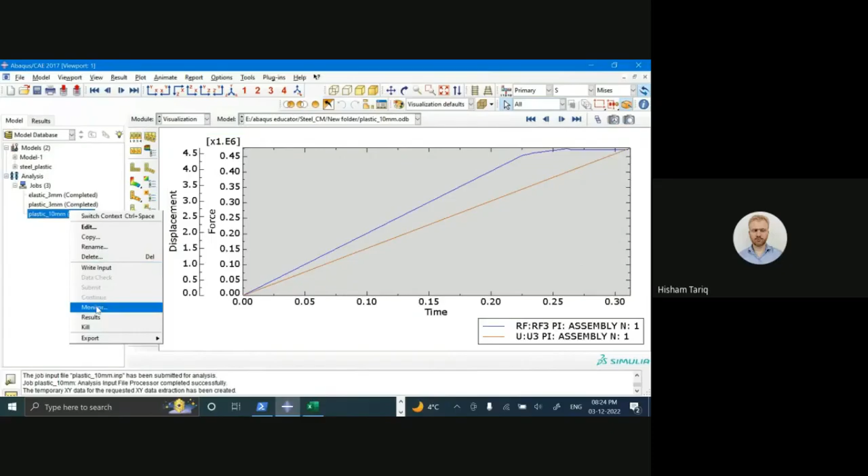Okay, so this is the fundamental behavior difference. If I had given steel as elastic and 10 millimeters of displacement, it wouldn't matter much, it would still complete the job very fast because the material is defined as elastic. But since I defined plasticity and made sure the boundary conditions and loading are such that the material is pulled enough for the stress-strain response to go into the non-linear region, that is why convergence issues are there.

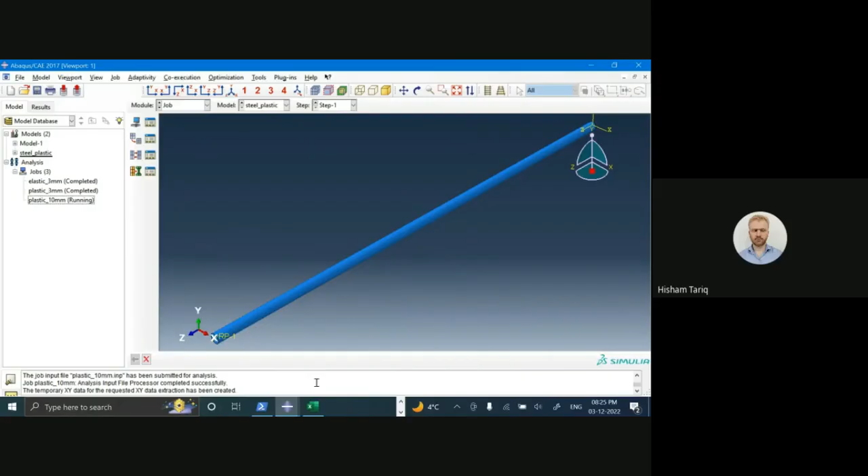So this was the basics. Later in the course you will first model a steel beam, then I'll show you cyclic loading. For that it's relatively different — we have to use parameters and study hardening, both isotropic and kinematic hardening, everything. That obviously takes an hour in class. So this is pretty much it.